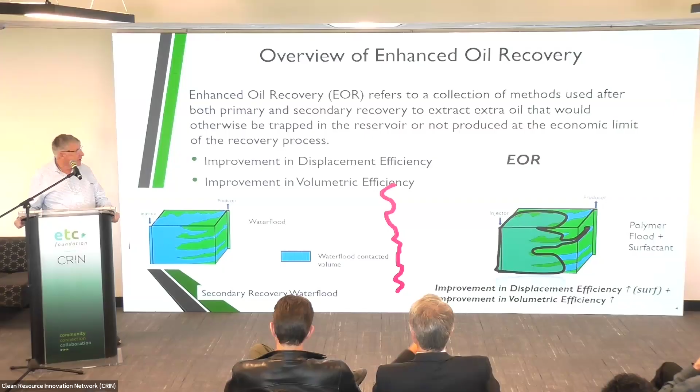Okay, so what is EOR? Well, basically, it's a collection of techniques, and you're trying to improve recovery from primary recovery, just pumping the oil out, or maybe water drive and/or water flooding. So you're trying to improve recovery higher, and it consists of two components. Basically, displacement efficiency, which is a microscopic type of improvement, where you're reducing things like interfacial tension and allowing the rock to be better scrubbed. And then the second aspect is to improve sweep efficiency.

So if you look at the diagram on the left-hand side in terms of the lower, that's what a classic water flood looks like, with a schematic view with an injector and producer, and we're injecting fluids into that reservoir, and we don't get perfect displacement efficiency or perfect volumetric sweep efficiency. So what we like to do in EOR is what I show on the right-hand lower side: I want to inject, let's say, a polymer or surfactant, and the polymer is going to get me better volumetric sweep. And then for displacement efficiency, the surfactant scrubs the rock, or a CO2 will scrub the rock better.

Okay, so if you look at the diagram on the right-hand corner again, the one I showed you previously was surfactant and polymer. Now, with CO2, because CO2 has a lower viscosity and also has a tendency to override in a zone, you get generally poor sweep efficiency, so you don't necessarily contact the same amount as, let's say, Eric would do in a polymer flood.

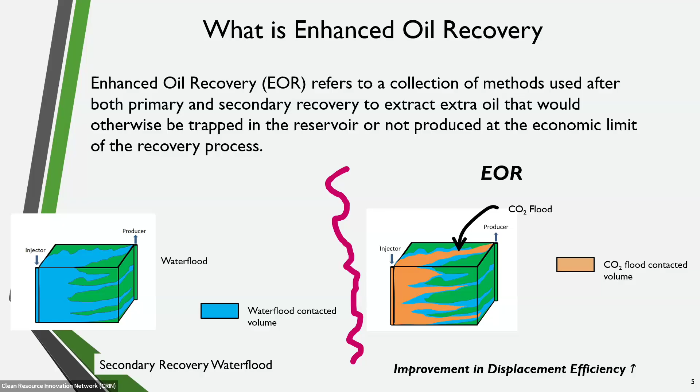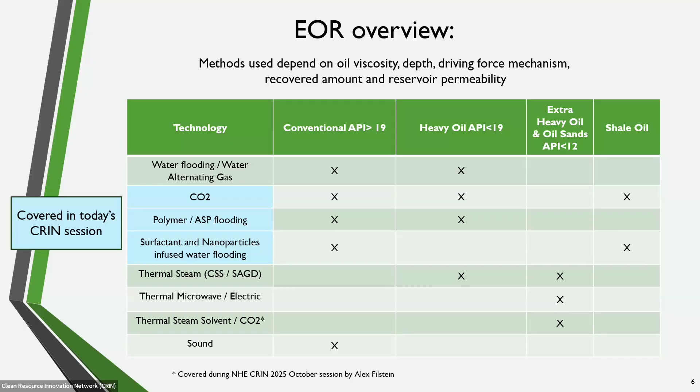Okay, and what are we talking about today? Basically, three areas. We're talking about CO2, polymer and alkaline and chemicals, and then Ali's going to talk about nanoparticles and surfactants. Obviously, EOR is huge. If you let me talk, I could talk for a week on all the EOR in the world. You'd all be asleep then. But we're just going to focus on these three today, and look at how we're applying that technology.

Okay, so this is a good friend, Eric, and he knows about as much as anybody in the whole world in terms of chemical flooding. So I'll let you take it. Thank you, Richard, for the introduction, and thanks everyone for attending. So let's see if I can get this right.

So Richard already started talking about EOR and explaining how it works and what the goals are. From a chemical EOR standpoint, we are dealing with three components. The first component is polymer, which can be used by itself. Polymer is a powder that you dissolve in water, and it makes water more viscous. That's the mobility ratio improvement and sweep efficiency improvement Richard was describing. The second main component is surfactant, which is there to reduce the interfacial tension and, as Richard puts it, scrub the rocks. We want to reduce the residual oil saturation, which neither water nor polymer can displace. Polymer does not reduce the residual oil saturation. So those are the two main components.

And then we have the third member of the team, which is alkali. There are different types of alkali, but basically alkali has several uses. It is generally used in combination with surfactant because it can generate surfactant in situ by combining with the oil present in a reservoir, and the other use of alkali is that it reduces surfactant adsorption. Surfactant is extremely expensive, so you don't want to waste a lot of it on the rock surface. So those three often go together. Polymer can be used by itself, but surfactant and alkali very seldom are. In most cases, you have polymer at least to provide the mobility control that you need.

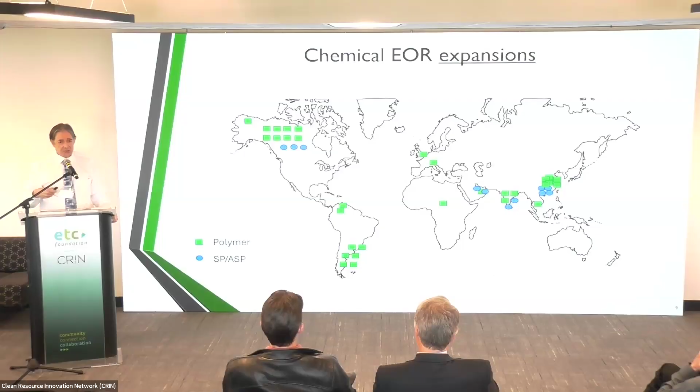This is a graph of worldwide expansions. I'm not talking about small-scale pilots, but large-scale expansions with dozens or even hundreds of wells injecting chemicals. Canada has been really at the forefront of chemical EOR. Well done, Canada. And of course, China has done chemical EOR for as long as I can remember. But there have been some interesting developments in recent years. Argentina, in the south, has done lots of projects, mostly polymer, at least the large-scale ones. The US has woken up after a few hundred polymer flood pilots.

They have managed to get one large-scale polymer flood in Alaska. They have realized that heavy oil, whether it's in Canada or in the US, it's still heavy oil. So if it works in Canada, it probably works in the US. And they are getting really good results.

Then another very interesting novelty is in offshore UK, where they are doing polymer flood. Polymer flood, for a number of reasons, has always been used onshore 99 or even 99.9% of the time. But there are a few polymer floods offshore, and this one is really a novelty started by Chevron many years ago.

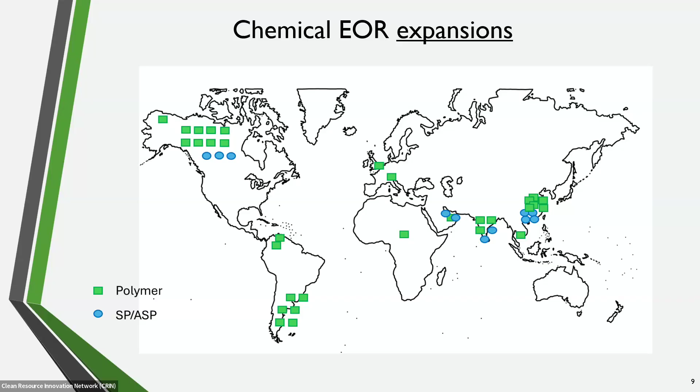So now let's look at all the processes separately. Polymer flood, as I was saying, has been really a huge success. It's a very robust, proven, and commercial technology. We have lots of polymer floods in Canada, Pelican Lake being the largest one, but you also have Cactus Lake, Bodo, Cosine, etc.

And then there are many other projects that have not been published but are still ongoing. If you look at the bottom of the screen, I've tried to put a kind of oil viscosity scale where we can apply polymer. It goes from light oil, but to be honest, when you have light oil, 1 CP, like they have in Sirikit in Thailand, you're not going to get a great improvement because the mobility ratio is already very low. So how can you improve it further?

And then the other side of the scale is the viscous stuff. So how viscous can you go, really? From my experience, above 10,000 CP in reservoir conditions is going to be really tricky. Anything below that, you're good, but if you want to try above that, it's going to be very difficult. At the bottom, you have the various large-scale projects that correspond to the various viscosities.

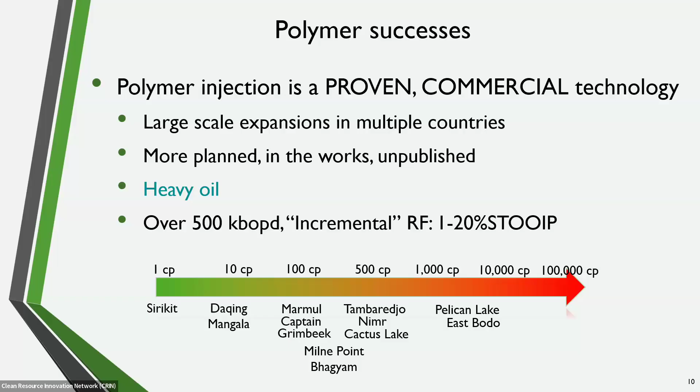What are the challenges with polymer? I told you a lot about the good things, but there are still a few issues. The limit in permeability, how low can we go? Polymer molecules are fairly big, so you cannot inject them in unconventional reservoirs, for instance. It's never going to go through the very small pore throats. I would say around 20, 30 millidarcy you are starting to have problems. Above it, it's okay; below it, a little bit tricky. There are a few tricks we can use to deal with lower permeability, but it's not straightforward.

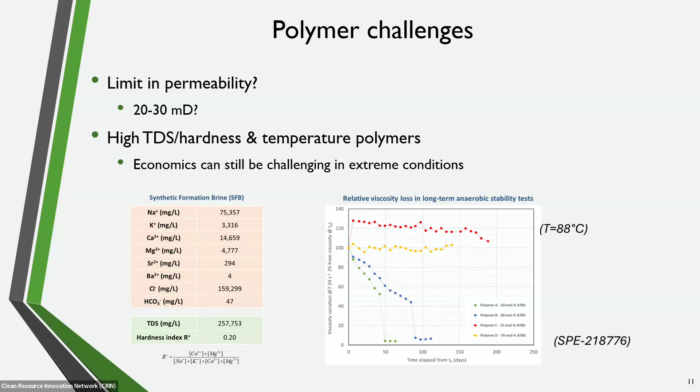And then high salinity, high hardness. We don't have a lot of that in Canada, but internationally we do. What I have here are examples at the bottom, corresponding to a reservoir in Kuwait where they have almost 260 grams per liter of salt. This is really pushing the polymer to its limit. On the right-hand side, for this same water, you have the polymer resistance with time, and we see that it's really difficult to find a polymer that will withstand those conditions, especially when temperature is high. In Canada, again, not a problem—often temperature is lower, but that's one of the limitations.

Surfactant, as I was saying, really reduces the interfacial tension, and it can be used to change the wettability, as the project in Qatar showed. What we are trying to achieve is to reduce the residual oil saturation. Polymer doesn't do that, and surfactant is expensive. To give you an idea, polymer is typically $2 per kilo, surfactant is 5 times that. And it adsorbs a lot more than polymer. So a lot of times the economics of surfactant injection is a bit tricky.

Again, that's a core flood. But in the core, we can get almost 100% of the oil. After that, we have the heterogeneity of the reservoir and all that we need to deal with. But still, if you don't get a good result in the core, it's not going to work in the reservoir.

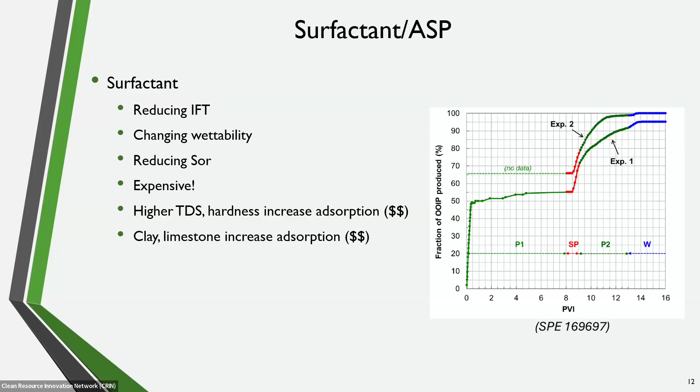So, a lot of difficulties for surfactant: higher TDS increases the adsorption, higher hardness as well, so you have to deal with all those things. The clay and the limestone, for instance, increase the adsorption of the surfactant, which is very costly, so you want to minimize that as much as you can.

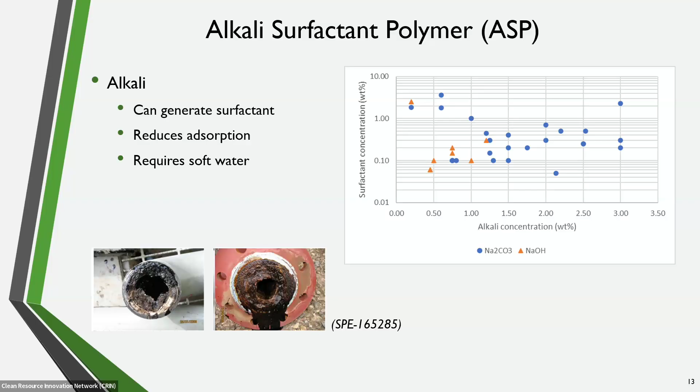It requires soft water—alkali doesn't like hardness. At the bottom here you have this very scary slide coming from the Taber ASP flood in Canada, where they had great recovery, increasing the recovery factor by over 10%. But they had huge scaling issues because of the alkali mixing with the hard water, and it wasn't very, very hard water. They could never find a solution—scale inhibitors and things like that were not 100% efficient. So this is really the limitation of alkali: if you don't have soft water, it's really difficult.

And then, last but not least, this is my last slide. What's really important, especially in the context of this discussion, is that chemical EOR can really help reduce carbon emissions. It's not 100% efficient, but it helps a lot.

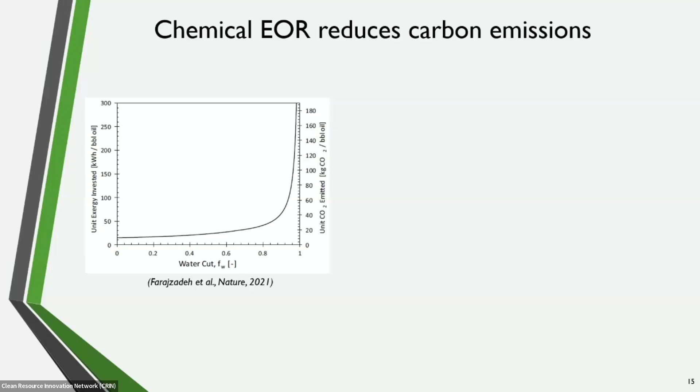One of the first publications on that was by Farajzadeh. What he explained in his paper, which is quite interesting, is where you generate a lot of carbon emissions when doing a water flood is when the water cut increases. The more water you have to produce—like we've seen water floods operating at 95, 99% water cut—it means for every barrel of oil you produce, you have 99 barrels of water to deal with. So you need pumps, big facilities, and this is what really causes the carbon emissions, or a large part of it.

So the idea is if you reduce the water cut, and polymer flood is a great help for that, you can really reduce the carbon emissions.

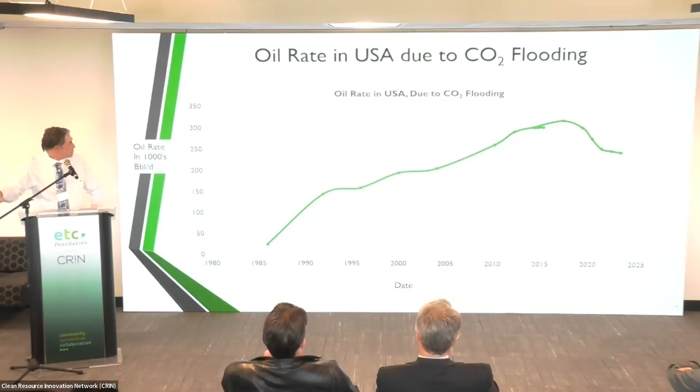There should be something—oops, nope, that was a big mistake. Sorry, I have to go backwards. I pressed too much. Yeah, one more, I thought there was an animation on that one. Oh yeah, here, okay, I was too quick.

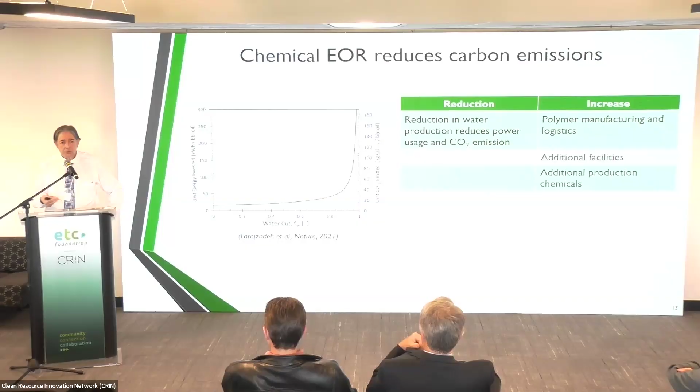We can do a carbon analysis where we see how much we gain by reducing water production, and how much more we spend—we need to manufacture the polymer, transport it on site. So there are pros and cons, but when you do the balance, this is a study we did recently in the Middle East. As time goes by, the orange curve is the water flood, and the green curve shows the performance of the polymer flood in terms of CO2 emissions. The polymer injection helps reduce carbon emissions significantly, depending on the case, but 20, 30, 40%—that's not unheard of.

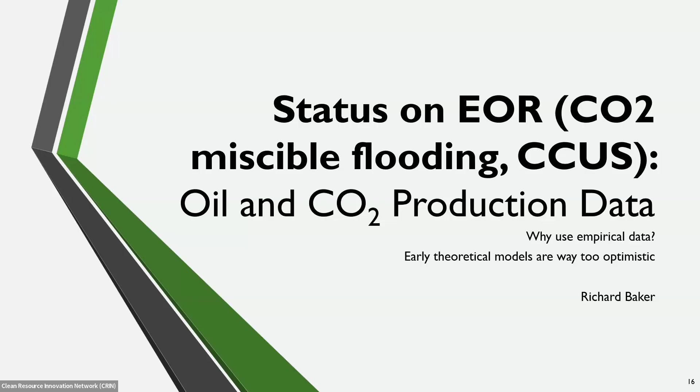Okay, I'm just going to give you an overview of where CO2 flooding is worldwide right now, particularly talking about North America here.

So I plotted here oil rate in thousands of barrels versus time. Now, what you need to understand is we've been doing CO2 floods since 1973 in Texas, so it's a relatively mature technology. There's always different combinations of heterogeneity, fractures, horizontal wells and that kind of stuff that make things novel, but it's a relatively mature type of project.

Where I got this data is basically Steve Melzer, a good friend of mine from Midland, Texas. He has a CO2 conference every year in Midland around December, and I took this from him today when I talked to him. The rest of the data comes from Advanced Resources International, they're out of Washington. So what I'm plotting here is oil rate in the United States, and I'll talk about Canada in just a sec.

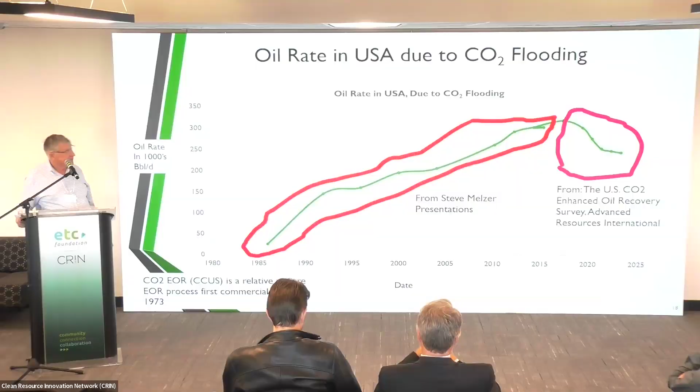You can see how much growth there has been historically. We started off in 1973, 1974 in terms of pilots, but they were commercial level pilots in West Texas, and it's grown since then. Peaks about 320,000 barrels a day. The last few years it's definitely had more of a downturn. There's been less incentive, primarily because of the shale gale, and then pricing uncertainty - the same things that affect oil sands and stuff like that, same type of arrangement.

Now this is from Advanced Resources International again, and I wanted to show you this because I think it gives a good idea. It goes from 1986 to 2022. This is U.S. oil rate, and the data is from about 2023, and you can see a steady growth. What you can get from this slide is there's been 3 billion barrels of incremental oil. That's an impressive number, okay? It shows you how well the CO2 system works in the United States, and I'm going to keep that in the back of your mind.

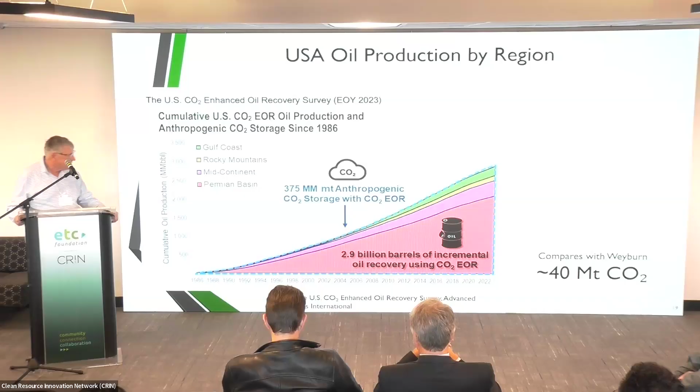They have stored over 375 megatons of industrial CO2 storage. So it's not stuff that's gone from a CO2 field into the Denver area - this is industrial CO2. Now, if you see how that compares, Weyburn Whitecap would tell you it's around 40 megatons of CO2 that they've stored already. So this is industrial source CO2, keep that in mind.

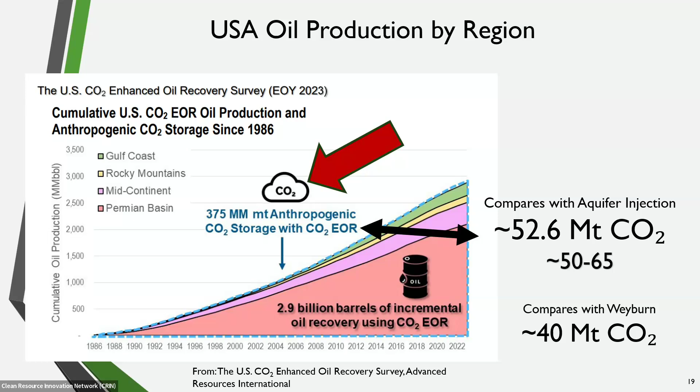When you compare aquifer injection, you need to understand there's CCUS - and I'm using U as in utilization, not underground. So this is a benefit to somebody, with a business plan associated with it. They have stored that CO2, and if you look at the worldwide amount of CO2 stored in aquifers, it's about 50 to 65 megatons. It's a range, you can't exactly determine it because not everybody reports CO2 the same way, but say 50 or 60. So it's about 6 times more what they've stored in Texas and the United States right now compared to what all the aquifers in the world have done to date.

I agree that aquifer storage will grow with time and it'll probably surpass EOR, no doubt about it. But right now it's like a 6-to-1 ratio, so we're talking a little bit of apples and oranges here. You can see where just Weyburn alone, my old project a long time ago, had stored about 40 megatons.

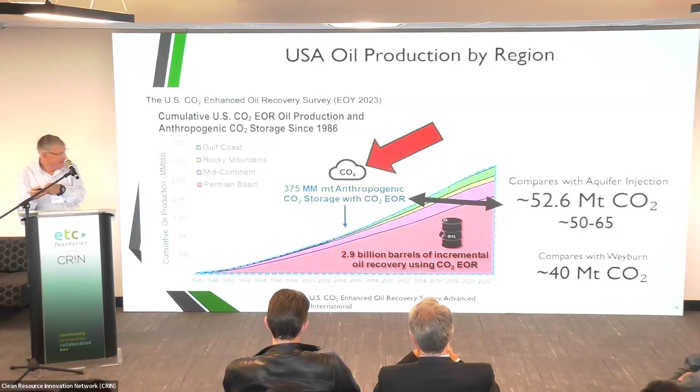This is from Steve Melzer again, good friend of mine. From 1992, all I want you to do is look at the number worldwide. There's not a lot of updates on this, which is kind of unfortunate - I guess we're all succumbing to the ChatGPT world. But from 1992 into about 2018, you're at about 165 projects worldwide.

So I don't want to give you the idea that CO2 flooding is brand new, okay? How you apply it in your fields, yes, there are changes - you know, Ali will talk about nanotechnologies or polymers, whatever, that stuff is evolving, but I think how we handle CO2 floods really isn't a brand new novel thing, and I don't want to pretend that it is.

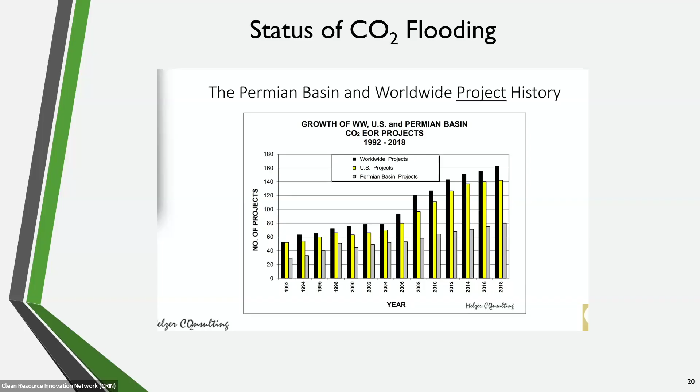Okay, so with that, I'll let Ali talk a little bit more, and we'll go from there.

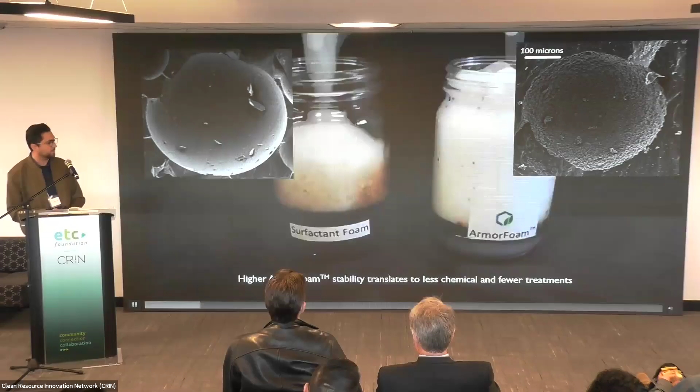This slide, I'm not sure if you can play the video from the panel over there, but it shows a quick video of how Armorfoam works compared to conventional surfactant foam, as Eric mentioned. One of the challenges of surfactant foam, beside adsorption and contact with rock, is that when in contact with crude oil, it collapses very fast, relatively quickly.

This left jar is filled with oil, and surfactant foam is added to that jar, while the right is Armorfoam, made with the same surfactant. That surfactant is a very good foaming surfactant, used in a pilot in Texas very successfully, a technical success as well. But what I'm trying to show here is how we can make it even better by adding nanoparticles to improve the stability of the surfactant-based foam at reservoir conditions.

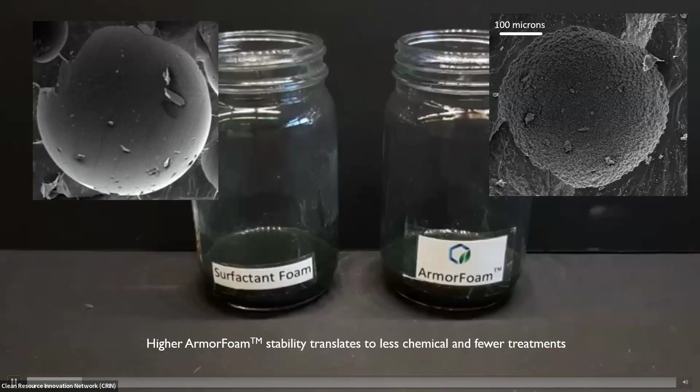What it does is help us reduce chemical costs. Now we can inject less chemical because the foam remains stable for a longer time. We have seen in our pilots up to 6 months or more just by injecting a few days or weeks of chemical. It also helps us tailor-make the product to specific reservoir conditions. I want to mention Armorfoam is not a product, it's a process of making a stable and strong foam for underground application. The reason behind that is shown in those SEM or microscopic images you can see on the top right and top left, showing one individual bubble of foam under the microscope.

On the right is Armorfoam bubble, on the left is surfactant-based foam. We are covering each individual bubble with a layer of solid nanoparticle. That will help us reduce adsorption to rock, reduce contact or interaction with the oil, and also high salinity. So we keep the bubble, hence the name Armorfoam. We are armoring the bubble, keeping it more stable at reservoir conditions so we can inject less chemical and improve the project technically and economically.

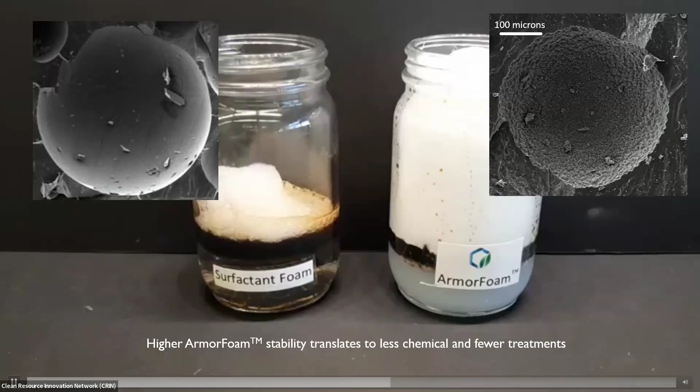In the next slide, I'm going to summarize some of our pilots that we have done so far. This table shows some of our pilots, not all of them. As we speak, we are doing two more pilots which are in progress.

Mainly these are CO2 injection or CO2 alternating water injection. There is one pilot that is produced gas injection as well, and they all have conformance issues, sweep efficiency issues, high CO2 production rate, meaning that the recycling rate is high. But if you look at the right side of the table, incremental oil rate - these are the benefits we have seen after Armorfoam treatment. That's very clear, incremental oil rate.

But what I want to talk about is the CO2 saving column. What I mean by CO2 saving here is the amount that the operator injects less to get that incremental oil. For example, in the first case, 20,000 fewer tons of CO2 have been injected to produce that amount of incremental oil. That significantly improved the project economics and also the efficiency of the flood.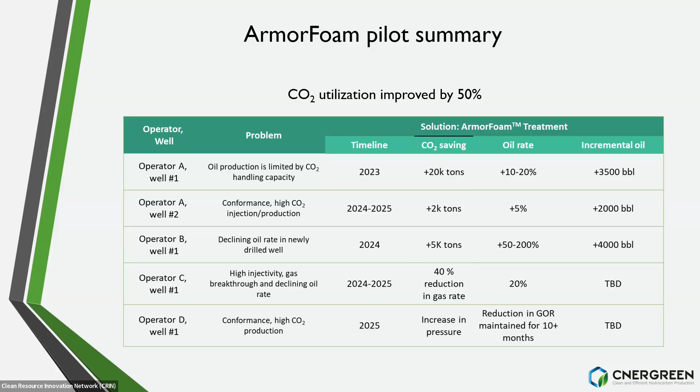In some cases, we have seen up to 50% CO2 utilization improvement, which if you translate that to field scale will be significant. So that extra amount of CO2 that the operator saved on that well will be diverted to another well and produce more oil. If you look at the field scale, that will increase the project economics significantly.

The other consideration that we haven't done here is the CO2 storage. If you look at the literature, there's a lot of data that shows that for every incremental barrel of oil that you can produce, anywhere between 0.2 to 0.8 tons of CO2 you can store. So you can easily calculate or estimate how much extra CO2 you're going to store by using such technologies.

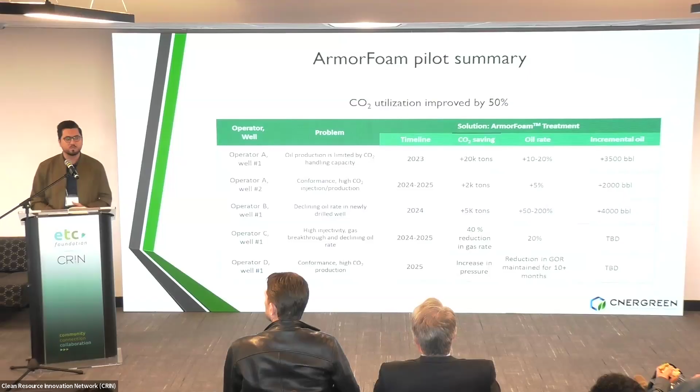I think Richard is going to talk about the potential incentive on CO2 EOR, and that will be game-changing for these kinds of technologies, because not only can we improve the oil, but increase the CO2 storage as well and bring another revenue stream to operators.

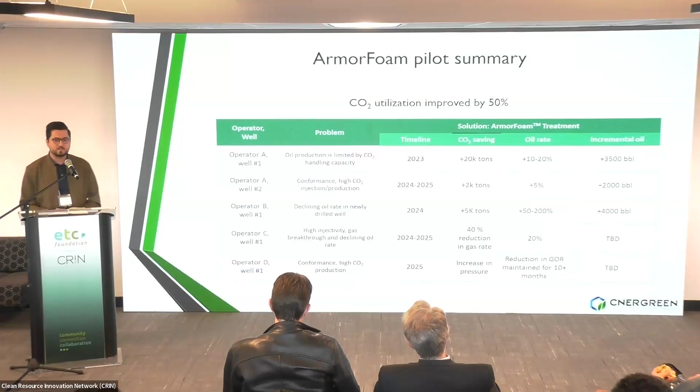This well particularly is very declining in terms of oil rates because of high communication and that problem that I mentioned in the schematic. CO2 is showing up in the production well very fast, in a matter of 12 hours. So when the operator starts injecting CO2, 12 hours later it shows up in the production well. That's why the decline rate is very fast. And they are also injecting water with CO2 - it's not a pure CO2 injection. It's mainly water with some CO2 cycled in between.

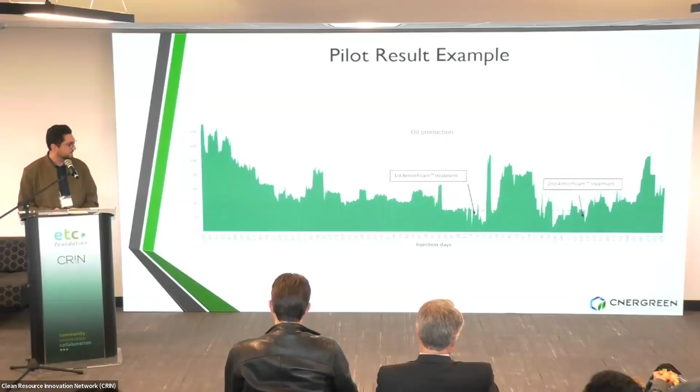Beside the CO2 EOR CCUS, another application we are working on is water flood application. So it's not necessarily like polymer, where you're completely changing the viscosity and continuously injecting that. It's augmenting the water flood or even polymer flood to improve the sweep efficiency of the water injection, just with a short treatment of the foam, and then you go back to your water injection. The reason we think it works is because this technology can be tuned based on the viscosity. So we can tune the viscosity of the foam to be in the order of a few centipoise to 100 or even thousands of centipoise to improve the sweep efficiency.

In Q1 or Q2, we are going to deploy one pilot in water flood. The previous slide I showed you in the field was mainly on the water cycle, and most of the oil increase we have seen was on the water cycle of the CO2 water alternating injection. So that was a trigger, plus all the lab data we have shows that there's potential for water flood improvement using this technology, and also any gas injection.

Beside the conventional reservoir, we have unconventional reservoir systems, like hydraulic fracture reservoirs where people use gas for huff and puff application. So you inject the gas underground, contact the oil, soak it, and produce it back. That's another application we are currently working on.

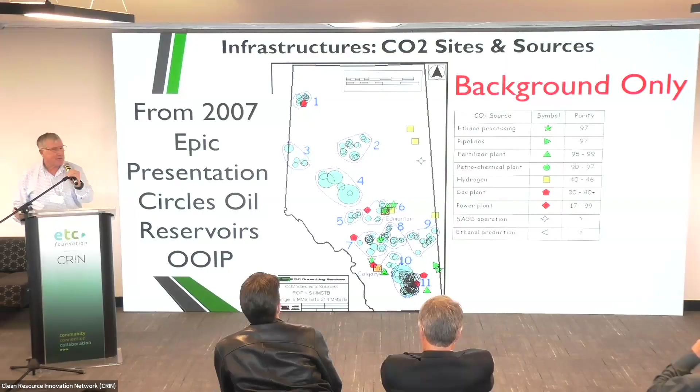Okay, and this is the data. It'll stay in your slide kit so you can look at the data a little bit better than what Michael and I did over the weekend. We basically reached the point of exhaustion on trying to make slides perfect. But anyways, to go on from that.

Okay, now this, I could spend another 5 days on carbon capture and storage, and I'm not doing it justice right now. I would like to spend more time, but I'd be boring you guys all to tears. What you need to understand with carbon capture and storage is it's a growing concern. It's strong, it's there, and whether you like it or not, it's definitely going to be a factor in terms of total storage of CO2. I believe in that totally.

But the thing that's nice about what Francis always presents is that he's looking at it from a systems point of view, and I think it's very important to look at CO2 from a systems point of view. Okay, so let's get to where we are here. Hopefully this will...

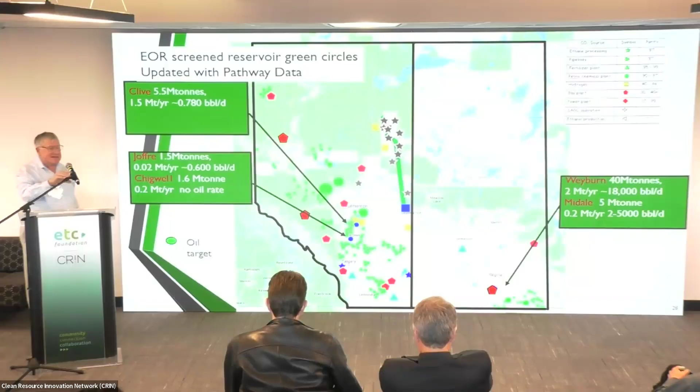Okay, now I have to give you a little bit of background here. Actually, you know what? I'm going to back up a little bit because I realized I missed something on that last slide. One more. Okay, on this slide, we also attached how much total storage has been done. And these numbers are probably 2003, 2004, somewhere in that range. So if you look at southeast Saskatchewan and you look at Weyburn, you can see there's about 40 megatons of storage.

Okay, a megaton per year is equal to 53 million a day. That's just to give yourself a conversion here if you're in cubic feet. So 53 is equal to 1 megaton per annum. Now Weyburn has stored historically about 40 megatons. It stores about 2 megatons per year, according to Whitecap, and it makes about 18,000 barrels a day of incremental. When you look at Midale, it's stored about 5 megatons.

So these are substantial, even from a worldwide perspective. They would definitely be above any aquifer storage that has been done historically. Midale has 5 megatons, and it's generating about 0.2 megaton per year. And it's a little harder to figure out what Midale's is. It's a range from 2 to 5,000. Now, let's go to one of my old favorites.

If you look at the Clive field, we've stored about 5.5 megatons in that one, and it is injecting at about 1.5 megatons per year, and it has a pretty tiny oil rate, 780. And then if you look at Joffre, it's 1.5 megatons of storage with tiny rates, and Chigwell is the same sort of thing. So it gives you a feel, not of where every little dinky pilot is, but where the big volumes have gone. And if you just add up the Canadian totals alone, it's substantial.

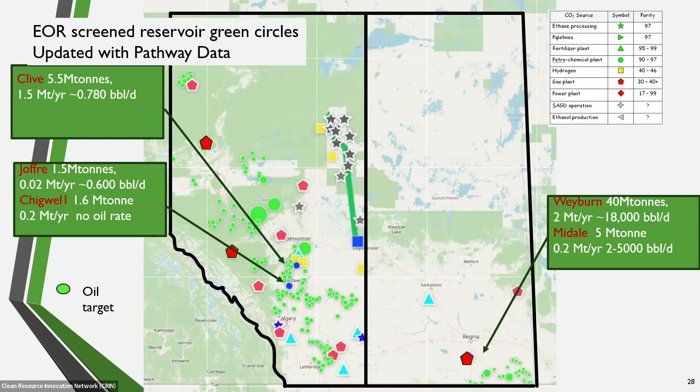So we need to take a little bit of pride in that, and I can definitely say for Midale, Weyburn, and Clive, I've had a hand in that. And I'm proud of what we've done here, storing things. So it's practical from an economic point of view, and it's practical from a storage point of view, in my opinion. Now we can go forward here. Sorry, you guys, on that one.

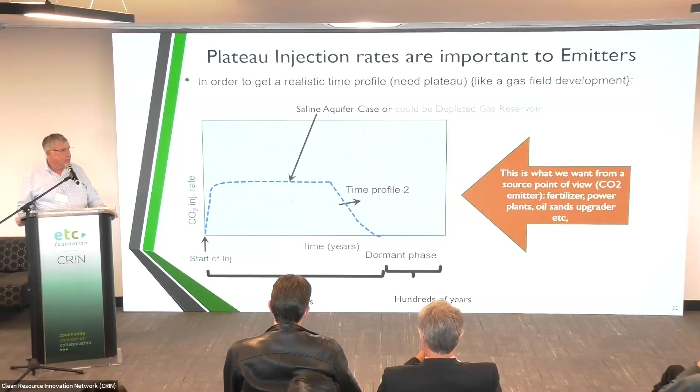Okay, now what you need to understand when it comes to economics is when you look at it from an emitter point of view, or from a pathways point of view, what you want is a very flat plateau in terms of CO2 injection, right?

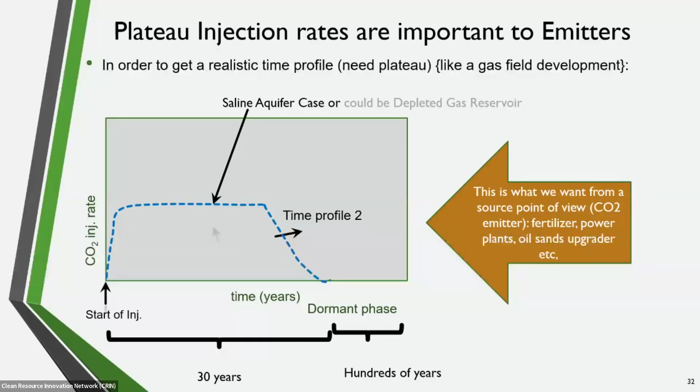So a lot of stuff that I'm doing in the States, they want flat plateau. We're taking the CO2 right now, and we're injecting it into aquifers and stuff. So you want that flat plateau, and you want it for a long period of time. Now, when you do EOR production, you get a lot more jagged edge. So what happens, I better be careful on this.

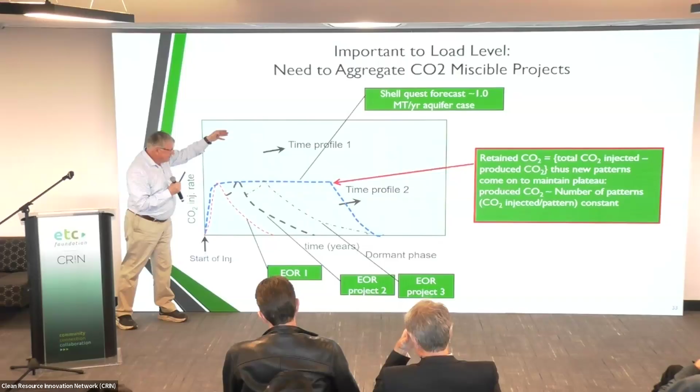What happens is you start an EOR, and it comes on, and it'll give you the peak oil rate, and then it declines. And then if you want another one, you do a peak oil rate, and then it declines. So it's not giving you that flat plateau, which the carbon emitters would love to have. That's what they want. They're gonna say, well, how much security do you have on that from both a capture point of view and a storage point of view?

So that's really important. So what we did in this case that I'm gonna show you is we only injected in one reservoir, and then we said, okay, we'll now go to an aquifer case. We'll inject the rest in the aquifer case. But you can improve your economics, obviously. If you look at West Texas and even Weyburn and Midale, the more infrastructure you have in the area, the more capability you have to grow because of the incremental economics.

Well, don't do that.

Okay, so let's talk about the economics. Now, what are we doing here? I'm comparing saline aquifer values to EOR, and I'm saying, how does this roll out? And I'm sorry, but even the politicians don't know the answers to this. They're guessing, really. I'm going to show you what I think is a believable case, and you can put me on a lie detector and ask me hard questions, and I think I'd pass fairly easily on it.

So I'm comparing a saline aquifer to a CO2 project. Now, what I'm going to do is a hypothetical cash flow analysis from it. Anybody who knows me knows that I'm not Mr. Economics. I didn't get distinguished authors in economics or anything, so you can take my results with a grain of salt, but still, they're reasonable. They make smell checks that we've done for the last 35 years. They're not airy-fairy type stuff.

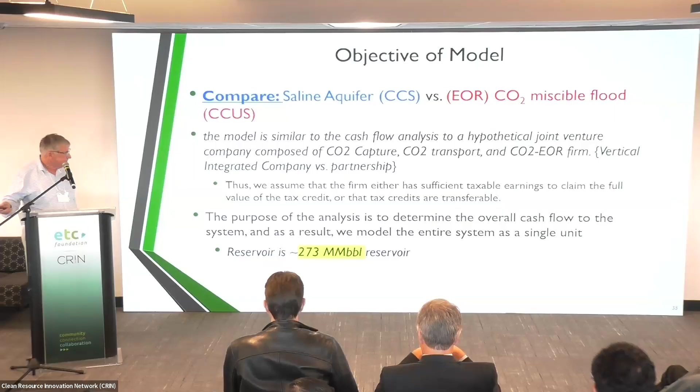And so we're going to assume an integrated company for the sake of argument here, and that company has enough taxable earnings to claim full tax credits. And the purpose of the analysis is just to look at the two systems. We're using a hypothetical of about 273 million stock tank barrels of oil. Now, when you look at the two cases, I'm going to start with the end, and then I'll show you the methodology we used, and then we'll recap at the very end.

And that's using $80 a barrel. It's using a Canadian tax of $130 per ton. That's like the grand bargain here. And then I compare that with the saline aquifer. Now the saline aquifer's economics are a lot more timid. They're not as robust. I'm only making 233 million. I'm at 13% rate of return, and it's a payout of 15 years.

So it would never fly in an oil company right now. You wouldn't necessarily have anything that has 15 years of payout. But the real advantage, which I'll get to at the very end, is that the system is a lot more stable, and there's tons of benefit from that infrastructure.

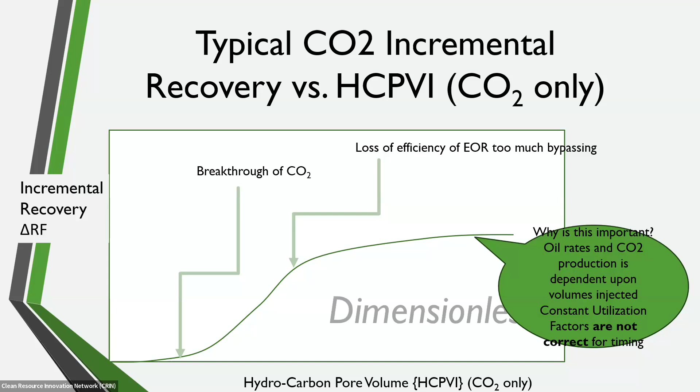Well, from a person who spent 40 years in simulation, if you pick too homogeneous of a model, or if you neglect bypassing or some of the stuff that Eric and Ali talk about, yeah, it looks fantastic on the design board. And that's what a lot of, I would say, aquifer projects today - they look great on a design board until you start doing it, implementing. I hate to use the term, but boots on the ground type of stuff.

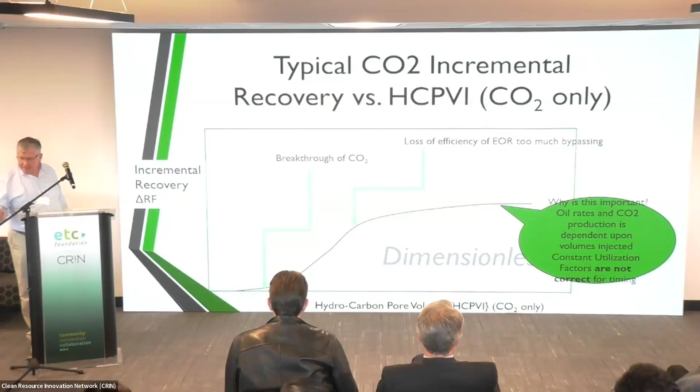Okay, now, I keep doing that. Okay. Now, I got to do one more. This is annoying. Oh, we'll forget it.

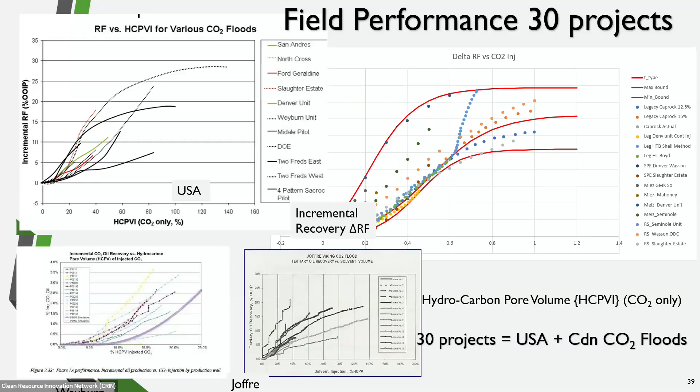Okay, now what we also did, again, for my friend Steve Melzer in Texas, was we took the Texas CO2 floods, and we also took Weyburn, and we know how much retention. So roughly, just roughly, for every 2 molecules you inject of CO2, you produce about 1 of them back, but they vary with time. So if you look at CO2 retention, it's like the blue dashed line here, and CO2 production is the red dotted line.

So we're using field data here. I really want to stress that. Oh, okay, the animations don't work quite as well. Okay, so let's just keep going. So you're basically thinking 2 to 1 in terms of injection.

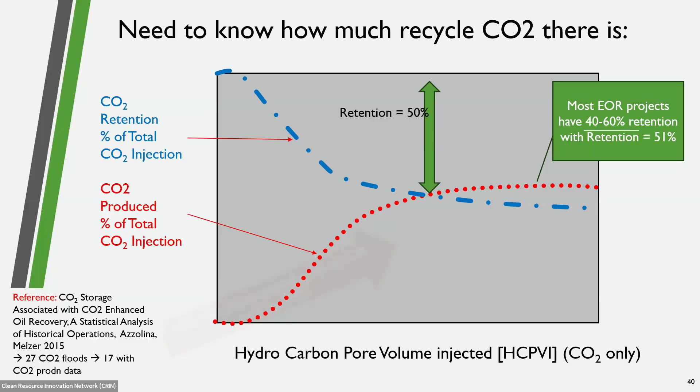Okay, let's look at the economics, because I said it's a function of what production forecast I have and what values I use for economics. And if anything here, I'm a little bit too liberal with - or I put too much capital cost in the EOR case, and I could have tuned it to make it better, and so I could get you down to 5 to 6 years payout, but this is a pretty good estimate here of what we've done, okay?

Okay, now, one thing I want to do is frame this problem for you, okay? When you're doing economics of CO2, whether that's CCS, aquifer injection, or CCUS, CO2 EOR, basically what I'm doing here is it's a function of a lot of variables, okay? Yes, surprise, surprise, oil price is a big barrier, is a big concern, but also what your CO2 tax is.

And the nice thing about what Carney and Smith did is it gives me a target, where before it was kind of floating in space. So I use about $130 CO2 tax here. The other thing that is a function of is what your field cost is. So we're dealing with old fields, we're dealing with legacy wellbores, and we're dealing with old junk.

The way I describe it is fixing up a house. When you buy your first house, it's not going to be pretty like a $6 million dream house, but it's practical. So we put in the field case, and that constrains it, and pipeline constraints are also a concern. As I said at the start, what you really want to move is CO2 from the oil sands area into central or western Alberta.

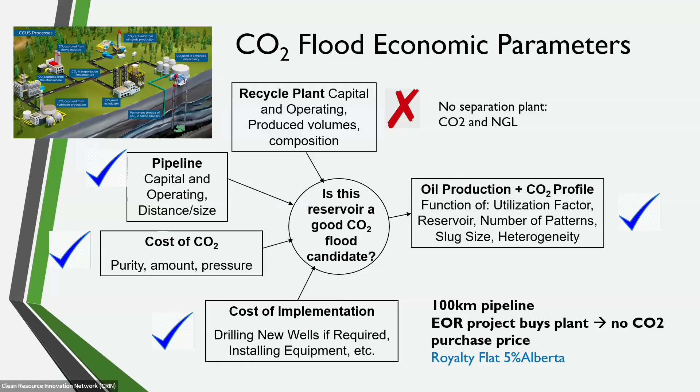For the case of EOR, I'm not going to use the injectors initially, but I'll bring them back in. For aquifer injection, I just use Shell's CapEx and OpEx as spent, and we use the exact same thing, so I didn't want to distort the picture with overly optimistic results. Then we used a 5% royalty rate for Alberta, which is standard practice for EOR.

So what's the difference between the two? The top is the saline aquifer, the CCS case, and it's straightforward because Shell's already published all this in their annual report, it's referenced. You take that and do a cash flow model. The only thing we're doing is running it at $130 a ton in terms of tax, and then getting payout, net present value at 10%, IRR, and cash flows.

In the EOR case, you're taking those same costs and operating costs for the plant, but subtracting out the well cost, since I'm not drilling into an aquifer initially, though I do drill into it about 13 years later. Then I add a pipeline cost and OpEx and whatever. Those are basically the additions I've made to this whole cash flow model.

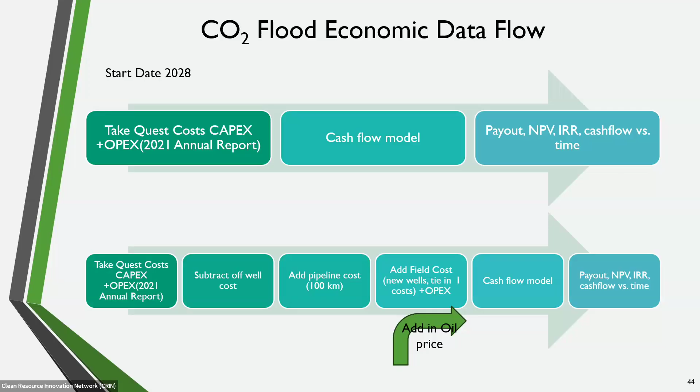So what does it look like? If this is my base case, I run it at $80 a barrel and $130 a ton, I get about a 30% rate of return at a net present value of $1.3 billion. It reaches payout of about 7 years, versus 15 years with a pure CCS project.

What I do is run this thing for 13 years or so, and then I drill those injectors, the same injectors that were in Quest, and add that to capital. That's why you see the net cash flow go down here. And you can see where it reaches a 7-year payout.

Now when you look at the price sensitivity, there's field costs, taxation strategies, and also price of oil. You can see how it varies with the price of oil, and surprise, surprise, it depends on the price of oil. We ran it at 50, 60, 80, and $100 a barrel US dollars, pretending they all started in 2028, for both the saline aquifer case and the other. You can see the big advantage here: a 7-year payout with $80 a barrel versus a 15-year payout with just a straight CCS project.

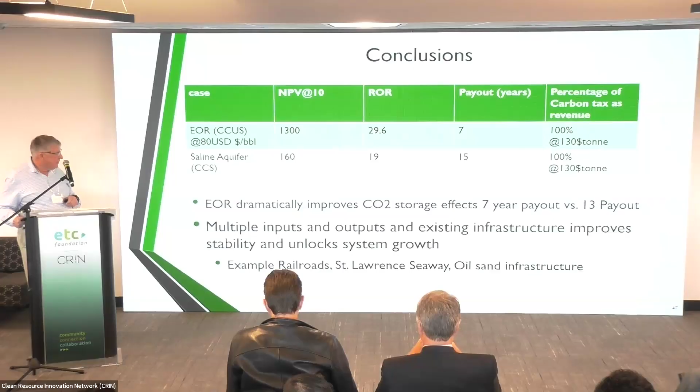Okay, so you can see here I put this capital program together, and you compare the two. I'm at a net present value at 10% of about 1.3 versus, now that one is slightly different, that's 160 million, I must not have updated it properly. But it's a 7 versus a 15. And your rate of return should be 29 or 29.6 versus, what was I at? 19%, 19% internal rate, sorry you guys, I missed that. Okay, so what you can see here, it improves the economics.

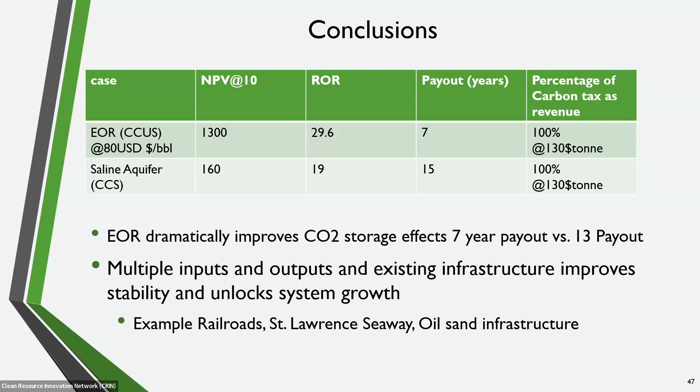It's not like it's going to make you fabulously wealthy all at once. It's still a lot of work for an EOR project. But what I really want to stress is what I show on the next slide.

Now the situation we have with aquifers in Canada is you have carbon tax, and that depends on what politics or what government, Alberta or Canada, right? So it's a very fragile system. It relies on taxation revenue, and even then your economics are very, very skinny, okay? So it's a long time per payout. Why is EOR so important in it, okay?

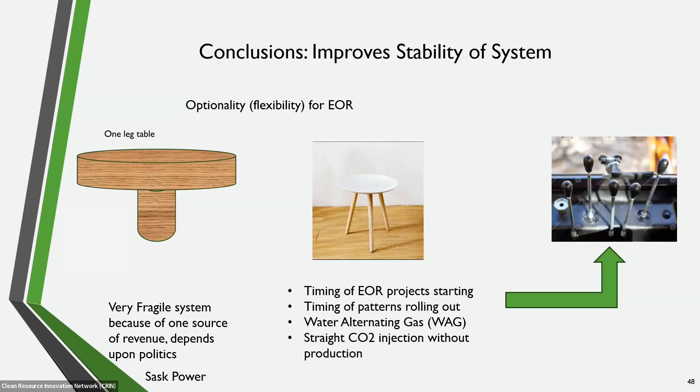Remember I showed you where they had 345 or 355 megatons of industrial storage in the United States. Why are they able to do that? Well, it's because they're relying on a system as opposed to one point type of thing. So what happens when you add EOR into it is it becomes way more stable in terms of it. Why? Because now I can use the CO2 either in an EOR situation or in an aquifer situation.

In fact, a long time ago, SaskPower asked me, okay, we're thinking about an aquifer here, we're thinking about aquifer injection, and how does that fit with - you know, I was on the EOR side of things, the CO2 - how does that fit with the aquifers? And my reaction is, from an industrial point of view, or an economics point of view, it's much, much more stable, because you have lots of levers for how to control it, and it doesn't become one project has all.

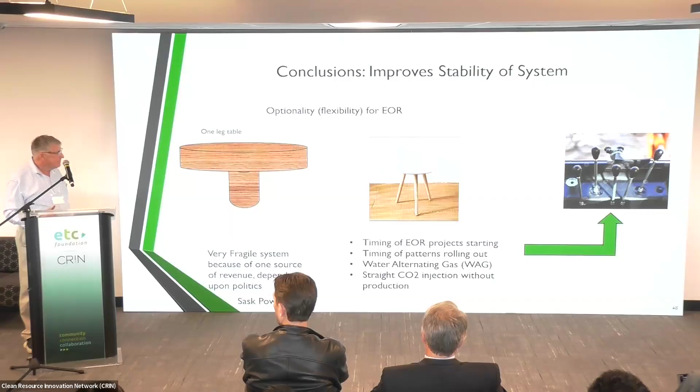Now I give my explanations in the next two slides in writing, and I hope most people will take the presentation. I lived in London, okay, and I could have had a car, the company would have paid for my car and all that. I never had it. Why? Because I prefer to use the tube, okay?

Well, when you look at systems, we really need to consider systems here, not just straight one-project type things. The tube in London, I think, was around 1870, 1860, in that range. And when you look at it, nobody in their right mind, if you said okay, I want to build a London tube right now and I want to have any kind of scale on it, the short-range economics would always say don't do it, okay? In fact, it's going to take you too long to do it. But if you look back now at London's subway system, it is an amazingly profitable, amazingly used system.

And that's true with railroads. So you think of railroads in Canada and how we brought BC into the Confederation. You look at the St. Lawrence Seaway, you look at power grid systems. Anytime we make a system, it usually improves the economics, because not only does it have more inputs and outputs, but most importantly, it means that other fields can come on.

So when you look at that Texas oil rate, and you say, gee, it peaked at 320,000 barrels a day, and yes it's dropped, okay, it's not as favorable as it was. But at the same time, right now, I know there were pipelines and companies in the States that went for good premiums. Why? Because it's infrastructure and systems thinking that's so important to solving our problem.

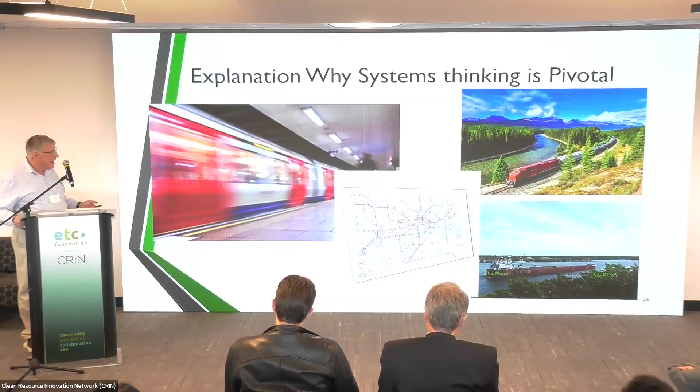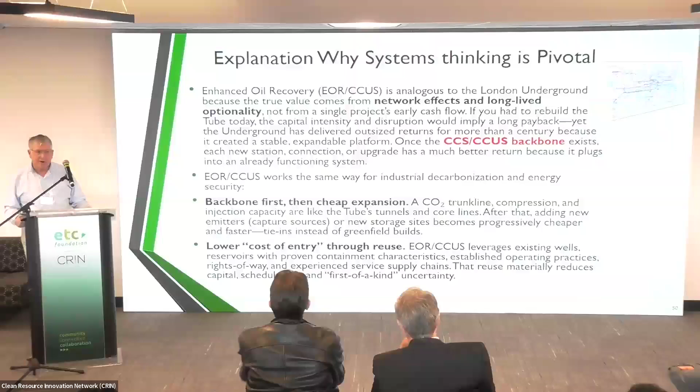If you add EOR projects onto it, it will make it better with time. I put my own descriptions in here because I'm so passionate about it, wrote it initially, then ran it through chat to make it better so you could read my writing and get the feel. But it's extremely important to think of systems. I always laugh when I listen to politicians, how it's all simplified - just use 6 MCF per barrel and away we go, the economics are great, or the economics are bad depending on which side you are. But they don't think of it in a systems type way. If you look at oil sands, railroads, the St. Lawrence Seaway, etc., a lot of the benefits we have is because of the infrastructure. So I'll get off my pedestal and finish the rest of this talk.

Okay, so you can stop listening to me now. So if I was summarizing things now...

What Eric says is undoubtedly true about chemical flooding. It's had huge success, it's had growth - I've been involved with projects in India with it, and what he's telling you is true. I think it's an undervalued thing, to be honest with you, and there's lots of good examples. It's a maturing technology, and it's maturing more because of the surfactant and nanoparticle type thing than just the straight chemical.

Surfactant and polymer, it's still ASP. You can start to see in India where they're starting to challenge some of that stuff, and it's on big scale. We're not talking about some little rinky-dink core flood here, we're talking about tens of thousands or hundreds of thousands of barrels incremental from that.

And chemical - what he stressed was that chemical EOR, because you're cycling so much, and you do cycle through heterogeneity, through induced fracture, there's all those things that are time consuming to correct. But what Ali says and Eric says is basically true.

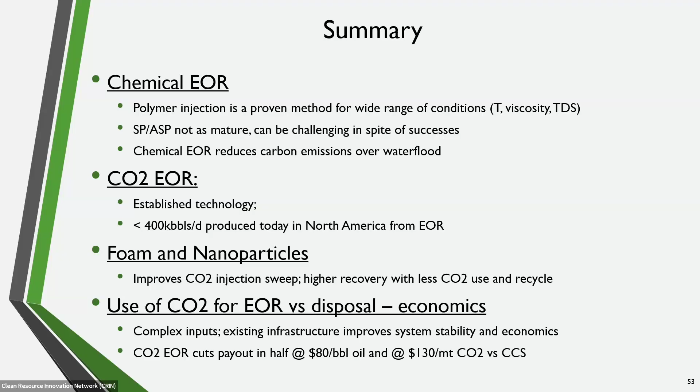When I talk about CO2 EOR, it's pretty established. I've been involved with Clive, Weyburn, Midale, whatever - it's not rocket science here, you guys. Yes, you're going to have to put some judgment factors in there. I noticed there's a lot of people from Tundra - you're going to have some adjustments when you're doing that, and they've done a great job in some of their stuff. Don't forget about the short circuits in real reservoirs, even though I'm designing on the average. Definitely I think what Ali says about foams and nanoparticles are true.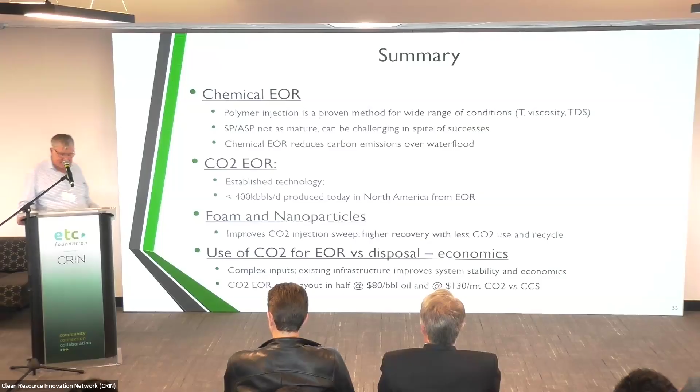So finally, when you look at the economics, EOR definitely has a big impact in terms of the economics. It roughly cuts your payout down from 15 years to 7 years, and it almost makes - I could have made it 35%, maybe not 40%, rate of return - if I cut capital. But I tried to keep it fairly honest, and it's consistent with what you see in economics in Louisiana, economics in West Texas, and stuff I've taught before here. It is price dependent, it does depend on the regulatory environment, and it's good economics, but it's not outstanding.

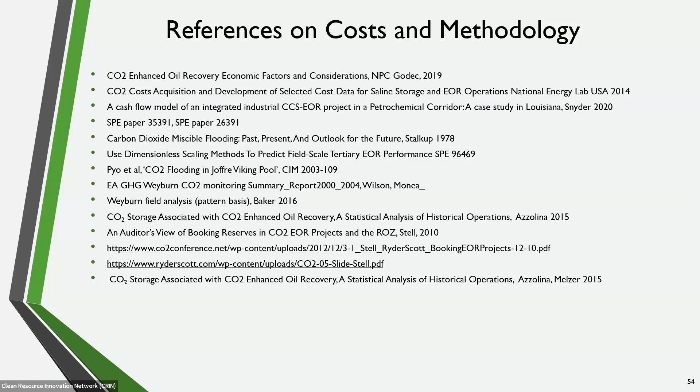I also included my reference list like I promised. And I think that's it, isn't it? Hopefully. Oh no, yeah, the other ones, this is more infrastructure type stuff. So, Roger?